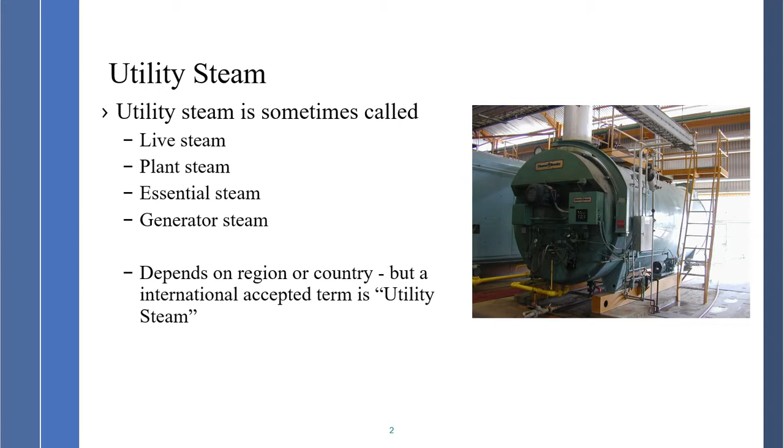Utility steam. Utility steam is sometimes called live steam, plant steam, essential steam, generator steam. But it really means utility steam, no matter what type of boiler we have to generate the steam. The internationally accepted terminology is utility steam. Utility steam can be saturated or superheated steam depending on the process applications and how we are generating the steam.

Steam produced from steam generating sources such as fire tube boilers, water tube boilers, HRSGs, heat recovery steam generators, reboilers, etc. So there's a multitude of ways that we can generate utility steam. But at the end of the day, it's utility steam which can be in saturated or superheated conditions.

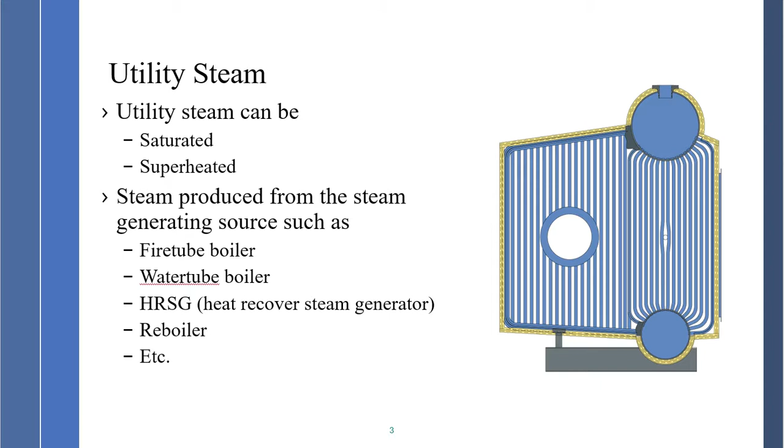Now, the water source that we use for the boilers can be water softeners, reverse osmosis, other means for water preparation. But remember one thing, utility steam is pure. No chemicals or minerals will be carried out of the boiler by the steam. And sometimes we use a corrosion inhibitor. Amine can be injected in the steam line to assist in preventing corrosion in the steam system.

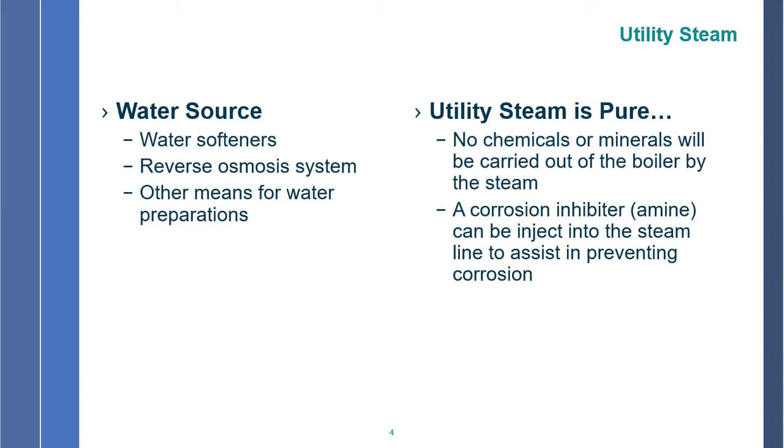So we get into types of steam and terminology. First one I want to talk about is saturated steam. Saturated steam is a dry and invisible fluid. Saturated steam is not wet steam. Wet steam is steam quality, which we'll be talking about in part 2. Saturated steam means saturated with energy, contains both sensible and latent energy. So remember, saturated steam is a dry and invisible gas.

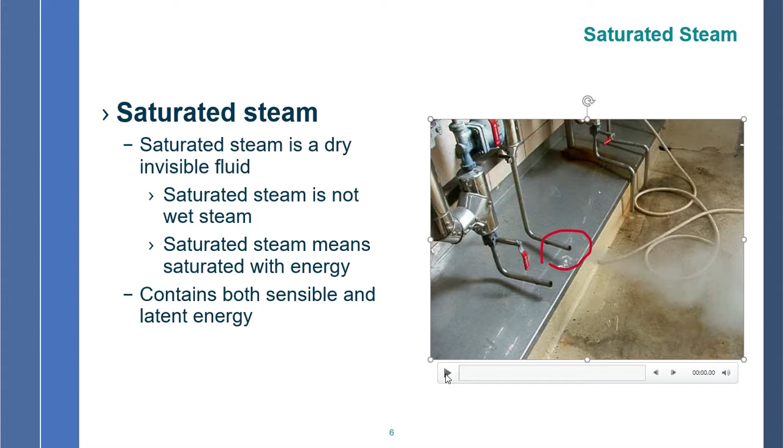So as you can see right here, when the steam is discharging to atmosphere, right here, it's invisible. You really cannot see it. So remember, saturated steam is a dry, invisible gas. You cannot see it. Contains both sensible and latent energy. Saturated with energy, not wet.

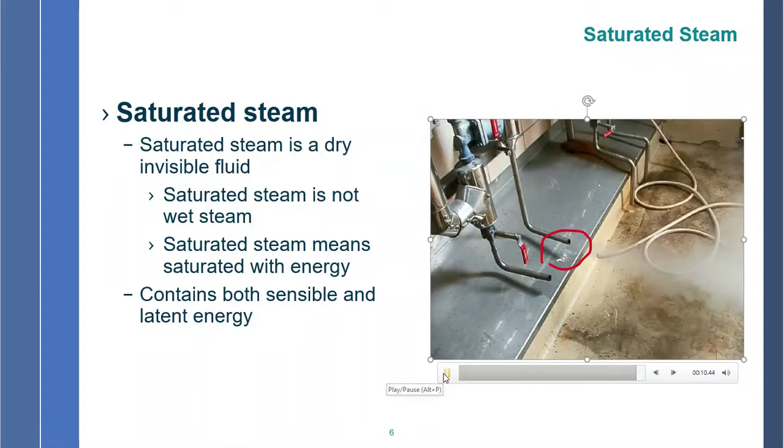Now, 98% of industrial processes will only use the latent energy of the saturated steam. Remember, there's two energies in steam, latent energy and sensible energy. So when the steam comes into the heat transfer from here into here, the latent energy is given up, condenses down to condensate, and the condensate is removed as quickly as it's formed to get the maximum efficiency out of the heat transfer. Sensible energy will be in the condensate and return to the boiler plant for recovery.

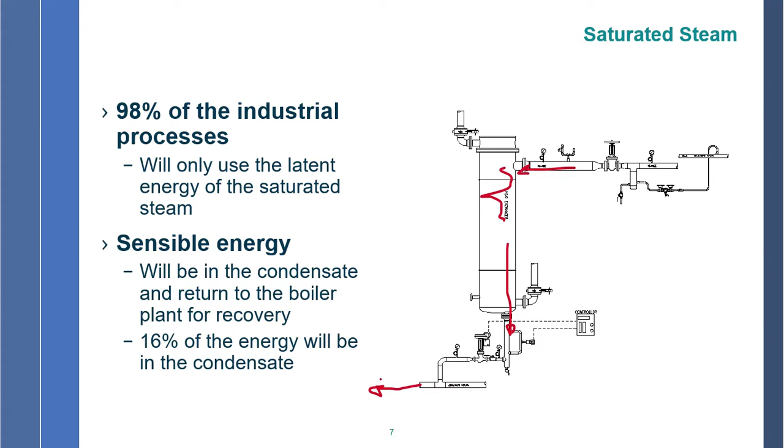Remember one thing, 16% of your energy sits in the condensate, so we want to make sure that we recover it. Now, latent and sensible energy of saturated steam content will depend on steam pressures and temperature. Higher pressure, higher temperature, less usable energy. People always say, I want higher pressure, more usable energy. You have less usable energy.

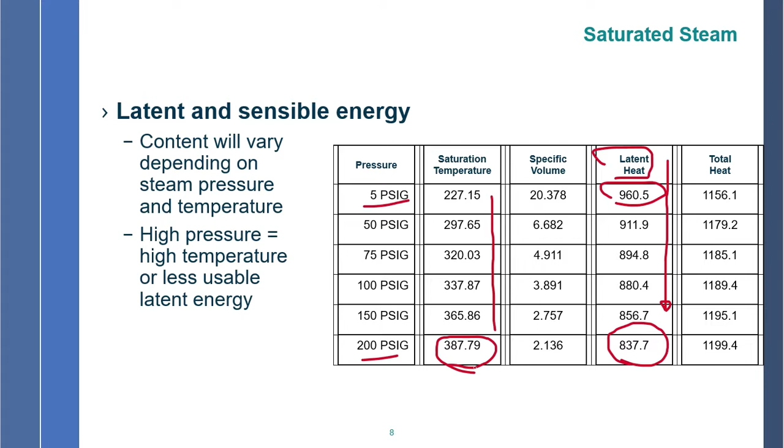Remember I said processes use latent energy. At 5 psig, the latent is 960.5 BTU per pound. At 200 psi, the latent energy is 837.7 BTU per pound. So as you go up in pressure, you reduce the amount of usable energy. But the thing about it is when I go up in pressure, I get temperature. And really what the process is looking at is the temperature I need to make the process work.

Saturated steam occurs when both liquid and gas phases are present at the same temperature and pressure. Many advantages: even heating throughout the heat transfer. Probably number one, ability to control temperature through the pressure, so I can control pressure to the process and also control temperature. High heat transfer coefficient. In particular, the high coefficient is why heat transfer primarily uses saturated steam instead of superheated steam.

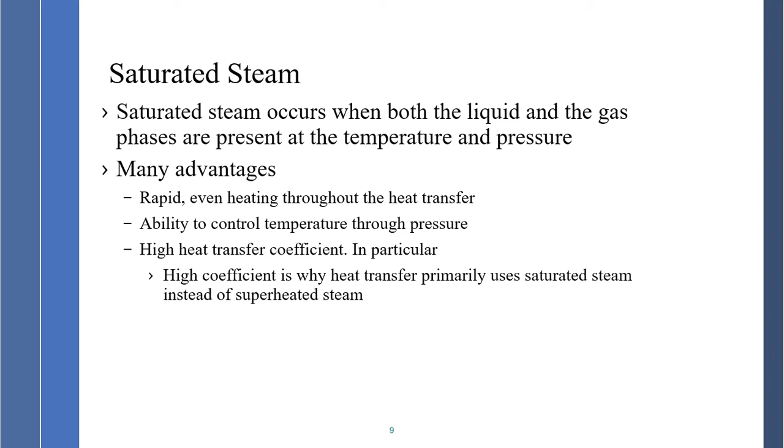The next one is superheated steam. So we produce superheated steam. We take the saturated steam, which is off of this drum here, and we put it through this bank of coils or tubes inside the boiler here, give it more sensible energy, increase the temperature of the steam without increasing the pressure. Remember, increase the temperature of the steam without increasing pressure. Superheated steam, higher temperature, lower density than saturated steam at the same pressure.

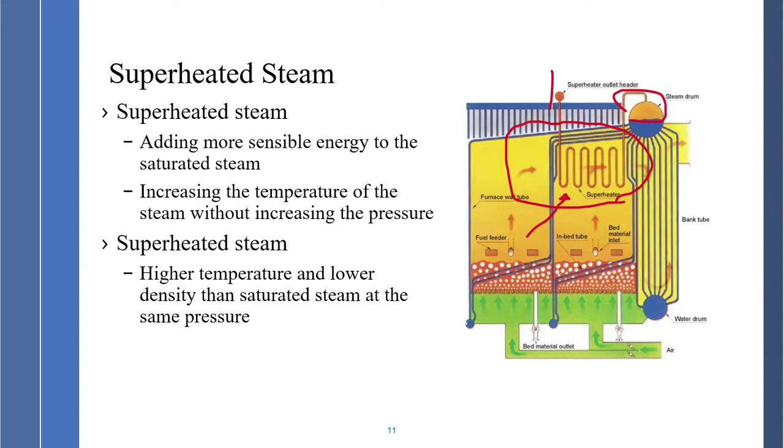Why use superheat? One thing that does not occur in superheat conditions is phase change or condensation. So as I'm going through multiple stages in a high pressure turbine here, I do not want condensation to occur. Condensation will have an erosion effect on the nozzles and the blades inside the turbine. So therefore, I do not want condensation to occur. So the applications: turbines, soot blowers, and a few high temperature processes.

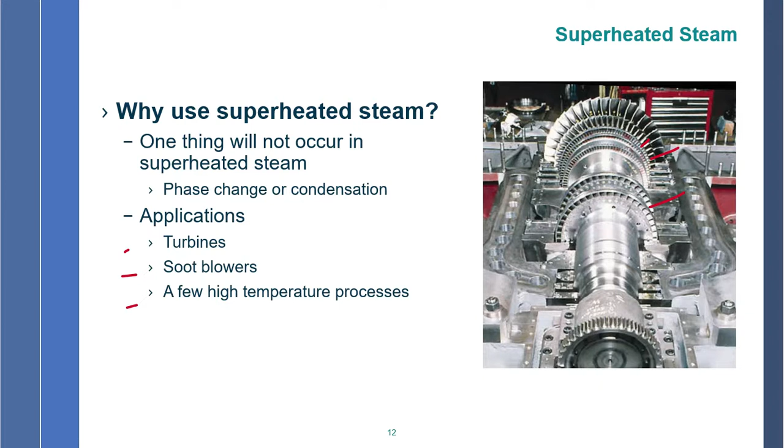So one of the things that we use superheated steam for besides turbines is soot blowers for the boilers. So a soot blower system is a tube here that injects steam inside the boiler between the two banks and blows soot off of the boilers. Quite commonly used on boilers that burn coal, wood, or black liquor, or some other fuel where we have to get rid of the soot buildup on the tubes. So that's another application that we use superheated steam for.

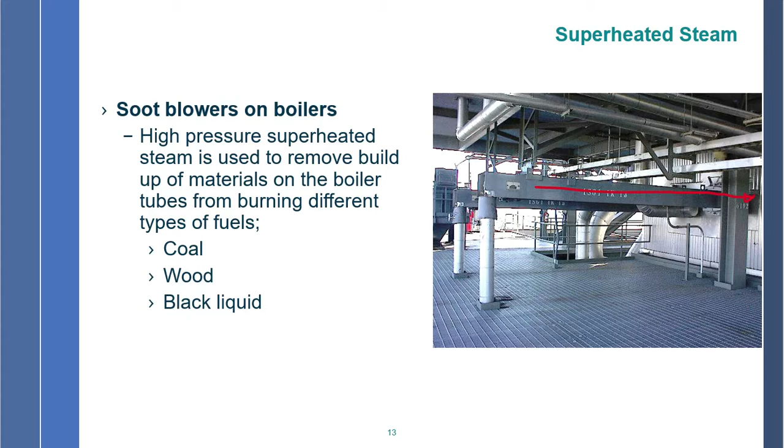The disadvantages of superheat, because we talked about the advantages, that condensation will not occur. The disadvantage is it has a low heat transfer coefficient. Variable steam temperatures at constant pressure. So the temperature can vary. It's not a direct relationship to the pressure. More expensive components due to the high temperatures. As we go up in superheat temperatures, of course, the materials will change due to the temperature.

The vast amount of latent energy cannot be released until the steam achieves saturated conditions. So when we take superheat and send it out into the plant operation, where we want to consume the thermal energy of steam, we'll add desuperheaters in the system, bringing the steam back to saturated conditions. Thus, when we go into heat transfer surfaces, the latent energy will be released.

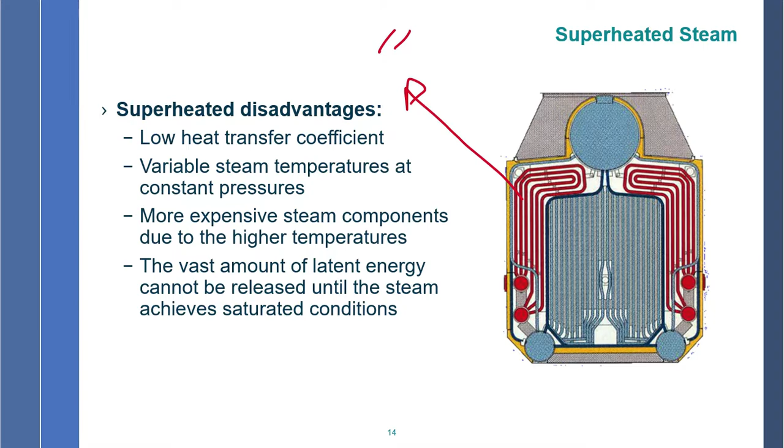So that kind of concludes part one, and there'll be several other parts to this because we're going to talk about steam quality, flash steam, pure steam, clean steam, the other terminologies that we use in steam.